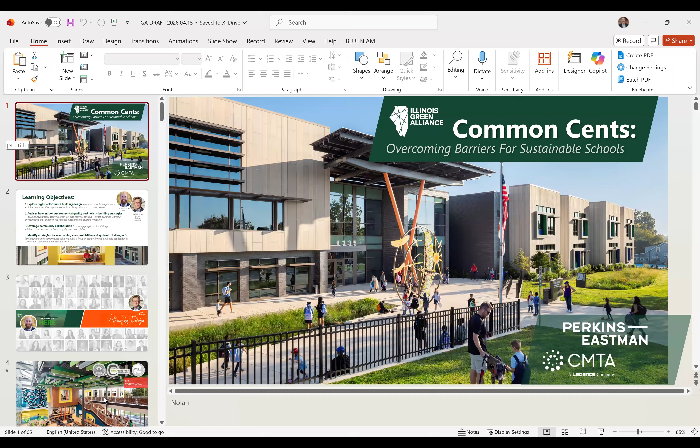Awesome. Thank you, Jessica. We're really excited to get this presentation going. And we're talking today about Common Cents, overcoming barriers for sustainable schools. What does that mean? How do we overcome these barriers? How do we create more sustainable schools?

So, learning objectives for today. Today we're going to talk about and explore high performance building design. What does that mean in school projects? We want to emphasize scalable, accessible approaches that can be applied across different market sectors. But primarily today, we're talking about K-12. We're going to analyze how indoor environmental quality and holistic building strategies can be used throughout the building. How do we increase daylighting? How do we make the acoustics better, bring in more fresh air, provide better thermal comfort?

We want to create healthier learning environments that enhance educational outcomes and student well-being. We will also want to leverage community collaboration, develop people-centered design solutions that prioritize inclusion, equity, and accessibility. And then finally, we want to identify strategies for overcoming cost prohibitive and systemic challenges in implementing these high performance solutions. How are we going to overcome those barriers? We want to focus on scalability and equitable applications that can extend beyond just a K-12 market sector.

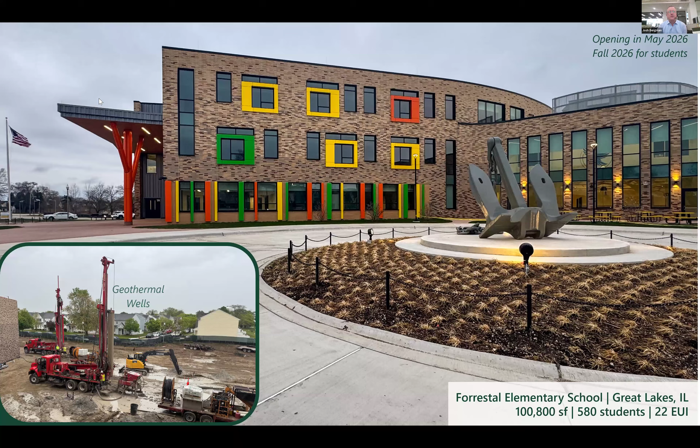We'll show you another view here. This is the bus drop-off for the building. The entrance that we were looking at in the previous slide is on the upper left-hand corner there. So it's on naval property, which is cool. And what's great about that is the Navy loaned us a great anchor from a ship, the USS Forrestal, which we placed in the bus drop-off there, which is kind of cool and fun and a fun place to arrive for students.

But also below that bus drop-off are our geothermal wells. And so there's roughly about 80 or so geothermal wells here that go about 500 feet deep or so that will help with the thermal comfort for the building.

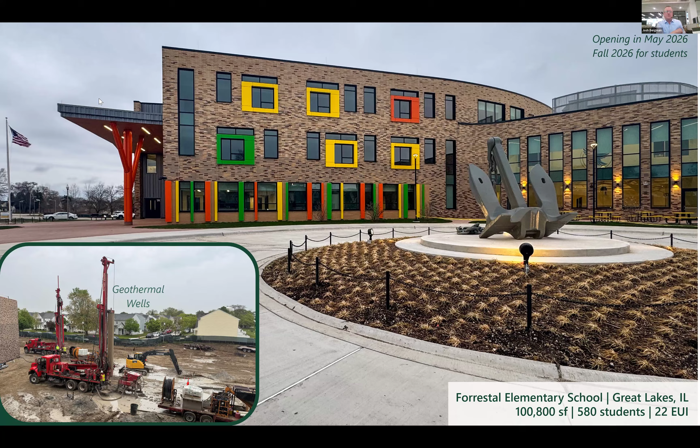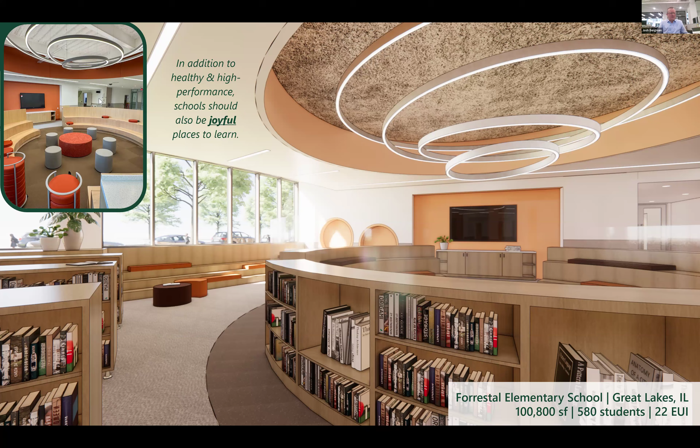With every project that we do, we have an approach that we bring to that, which we like to call net positive education. And what that is, it's really a combination of two things together. It's building performance and health and wellness. So building performance, meaning energy efficiency, net zero, and reduced energy costs, as well as health and wellness. So basically the interior health, healthy environments for the building. Those two things together combine to be what we call net positive education, because we think of the energy efficiency of the building plus the healthy environment as being a great synergy that provides a great place to learn.

So let's look at the first part of those ingredients, the building performance. How do we make these energy efficient learning environments? Looking at what we did on Forrestal, we're trying to reduce as much energy usage in the building as possible, right? So we're starting with our big mechanical systems and our plants. On Forrestal, we used a geothermal system. The geothermal system is absorbing heat from the ground, bringing that into the building loop, which then can be used for heating and cooling the building. But we're also rejecting heat to the ground when needed, depending on summer or winter. So we're circulating water down through the pipes in the ground, coming back out with our base mounted pumps in the mechanical room.

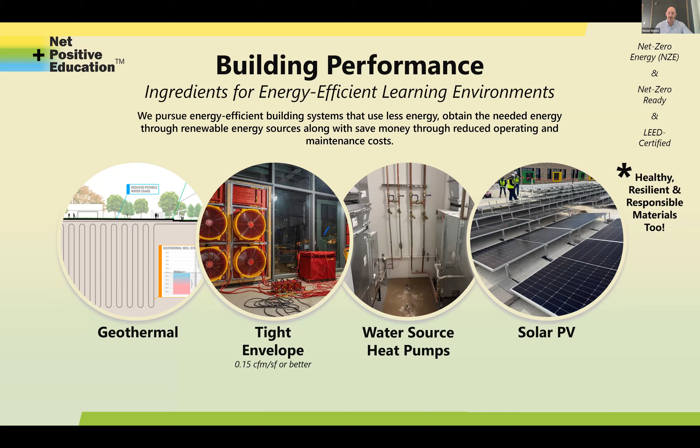And then our heating and cooling. We heat and cool the building with water source heat pumps. These water source heat pumps are very efficient, very residential in nature. They have a single compressor evaporator connecting straight to the geothermal loop and circulating water throughout the building. So our water source heat pumps are a backbone that really heat and cool the classrooms and different spaces. And then lastly, we have the solar PVs on the roof that help us harness some of the sun's energy, turn that into electricity, and use that throughout the building to reduce our energy consumption on the grid.

So if I can see the teacher, I'm at a comfortable temperature, if I can hear the teacher and they can hear me, and the air quality is good such that there's not CO2 levels building up such that I get sleepy in class, all of those things together combine to help get me alert and ready and engaged to learn.

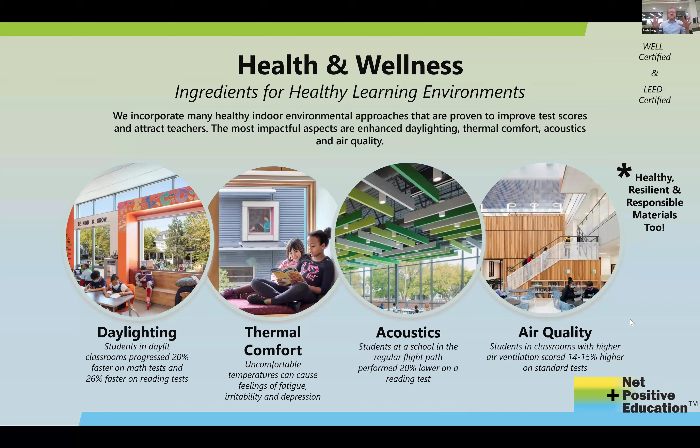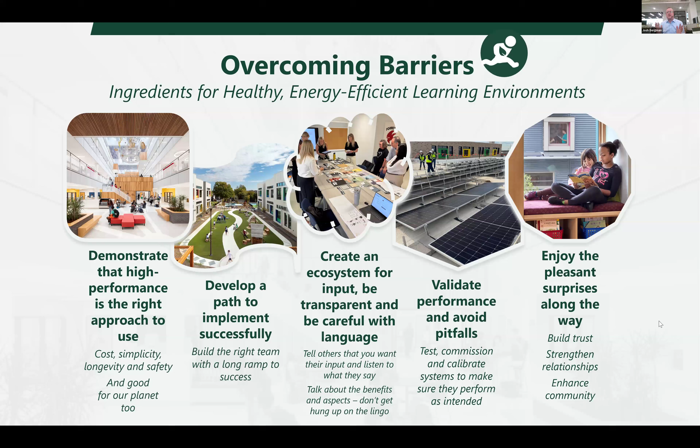And then lastly, it's just about enjoying the pleasant surprises along the way. There are surprising things that happen through this process, and it's helpful to celebrate those things along the way. So let's dive in. Let's start with cost. It's a big driver here.

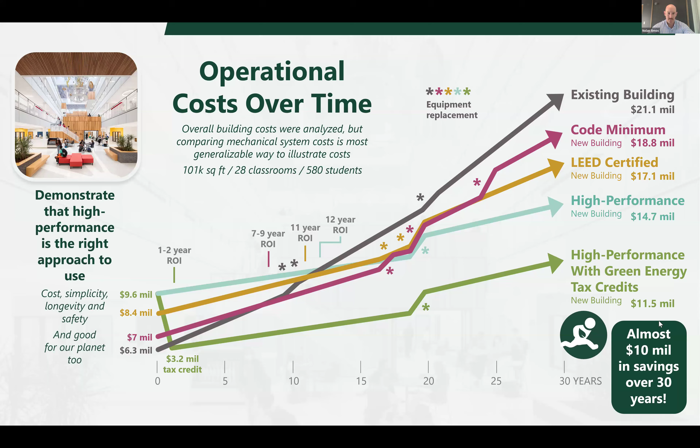So, in doing that and having the high performance system, we're implementing geothermal wells, which offer a resilient solution and a long lifespan, 50 to 70 years. Those are all underground, so any tornado events, any rain events, or different things, as we've seen over the past week, do not have an impact on those geothermal wells, and we're constantly getting those ground temperatures to be able to absorb and reject heat too. There's little to no maintenance required with that. Basically, you just need your base mounted pumps to be able to circulate the water through.

For the tight envelope, you're going to have a lifespan of about 30 to 50 years. Little to no maintenance required on that envelope. And again, we try and shoot for a 0.15 CFM per square foot or better on that envelope to make sure we're not letting conditioned air out into the atmosphere.

And then our water source heat pumps for thermal comfort. Typically, we're tracking about a 20-year lifespan on those. Very residential in nature, very easy to maintain. You're basically replacing your filters, cleaning out your strainers, and that's about it. We try and make those accessible and as easy to maintain as possible.

And then the solar panels on the roof. Typically, we're seeing about a 30-year lifespan. If you're going to go net zero, sometimes you won't have all of the roof span that you need, and you need to go to a carport or ground mounted or different things like that, but also little to no maintenance on those as well.

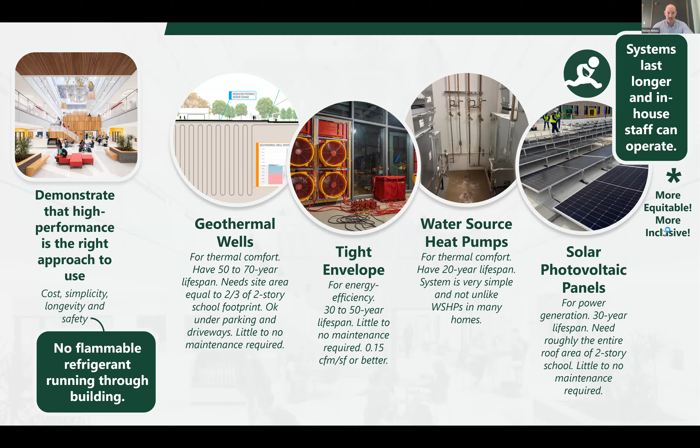And then just to reiterate what Nolan was saying, that's sort of the core argument about how we get over this high performance net zero hurdle with client groups. And it really just focuses around cost, simplicity, longevity, and safety. And so once we get over that hurdle, the next thing is just focusing on developing a plan to implement that approach successfully.

And so what we found to be effective with school districts is just to build a long ramp to success. Quite often, these are, as we mentioned, systems or approaches that are new to school districts. And so it takes time for them to get comfortable with them and implement them. And so we built a long ramp for them to sort of get up to speed on these systems. And so let's walk up this ramp together, I guess.

So first it starts off with just exposure to net zero high performance systems. And quite often what we try and do is bring school districts to our projects that are net zero or high performance. This includes superintendents, the business officials, and especially the maintenance team. If you get those three parties to visit a school and meet those counterparts in another school that has these kind of systems, those are the most important voices they want to hear. They want to hear from the superintendent and the maintenance staff about how effective these systems are for them. And those words are gold for us, and gold for the new client basically that may be implementing these systems.

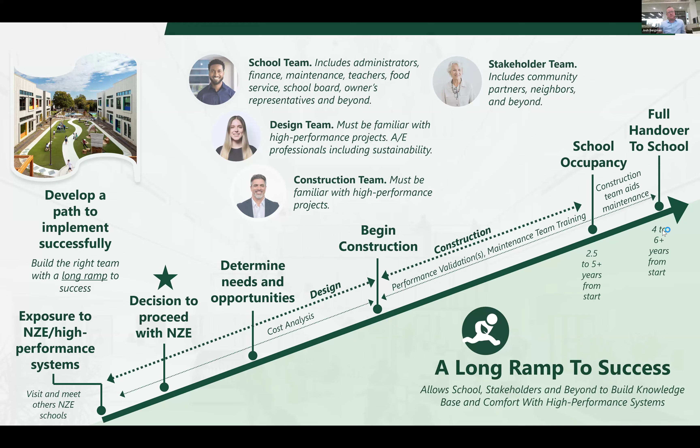Nolan's team and the CMTA team have deep expertise in these categories, as do we, and so it's a combined team that can do this kind of work. And then also we just want construction teams that have built these systems before, so it's really helpful. Especially developing a tight envelope, it's not easy to do, and it's higher than what your typical project does.

The next piece into implementing this path successfully is just right sizing and coordinating the systems to deliver the best value and performance for our client groups. Quite often, Nolan and his team will do an energy model. We, as the architectural design team, also do an energy model. So we both have energy models that are evaluating what are the best choices we can make. And so, for example, one of the key discoveries we have for work in Illinois is calibrating and right sizing the wall assembly to suit the HVAC system.

So a very efficient HVAC system with water source heat pumps can result in us maybe reducing the insulation and glass glazing needs. So the sweet spot we found in Illinois so far is if we have water source heat pumps, we can do R20, R25 for insulation in the walls, and then we can do dual pane glass in the windows. In other areas of the country, like in Boston, where we're doing work, the argument for triple pane glass is better than it is here. But ultimately, as we all know, it's just calibrating the systems and approach for value in the place where we're building.

Other ingredients we found that are helpful for us in Illinois are just the window wall ratio of around 25%. And then also, we're preaching to the choir here, but I think that healthy materials, in many cases, don't require any added upfront or maintenance costs. You can get paint and ceiling tiles that have great sustainability without any extra costs.

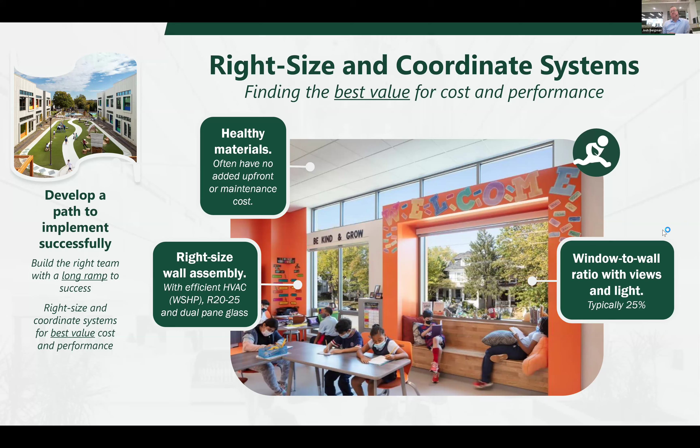For these kinds of projects, we quite often have a broader group of people that we're engaging with, and a broader collection of meetings along the way. For example, during programming, not only do we have programming meetings that talk about size, scale, use, we also have programming meetings dedicated to MEP. We also have program meetings dedicated to sustainability, and those meetings are really focused on right-sizing the systems and the approach to the needs of the school and the project, so we're not over providing or under providing. It helps us through the lens of being energy efficient, right-sizing everything to suit the need.

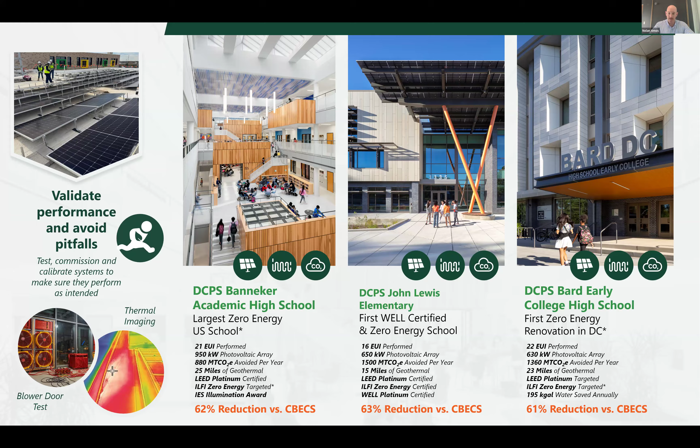As we mentioned, there are pleasant surprises along the way. For one, we're meeting with a broader group of people. We're meeting more often. We're also doing something that maybe some people in the room haven't done before, so there's the anxiety of something new. And what happens with all the collaboration and input is that we build more trust within that group, enhancing community, strengthening our relationships. What we found is that our client groups have stronger relationships with us along the way, which is great.

But what actually is most meaningful and most important are the relationships of the community partners with the school leadership, with the broader community, with the school district itself, as well as the actual school staff, the teachers. And so all of those relationships get stronger through projects like this. And so that's one of the most beautiful things that happens. We get stronger as a team. And so it becomes a success for everyone in the room, which is fantastic. And building trust, enhancing community, strengthening relationships.